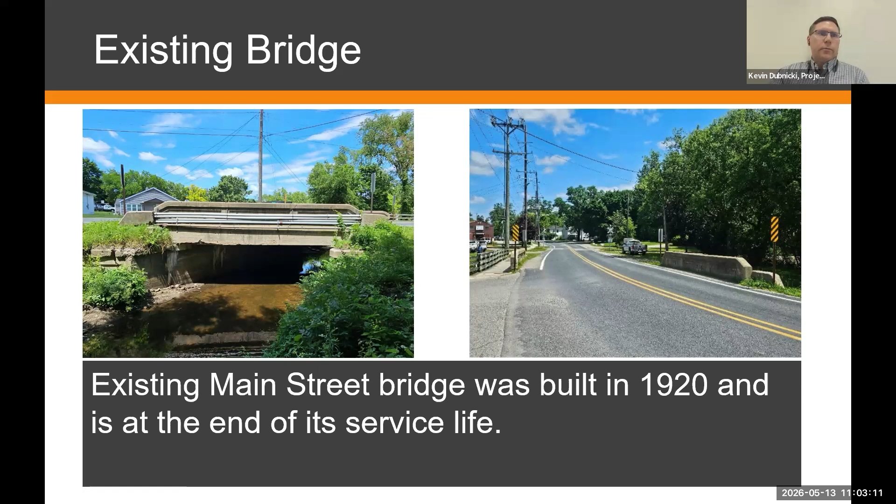The existing bridge is on Main Street, was built in 1920, and is at the end of its service life. Currently, there's a pedestrian path on the west side of the bridge, and it is a concrete bridge construction with asphalt overlay.

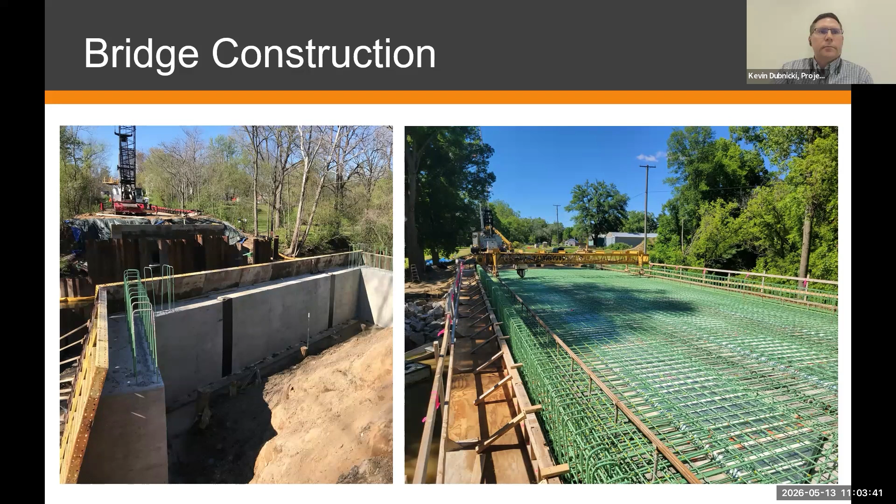The bridge section will consist of a concrete deck and raised concrete sidewalk located on the west side of the roadway, and will utilize tub girders for the structural support.

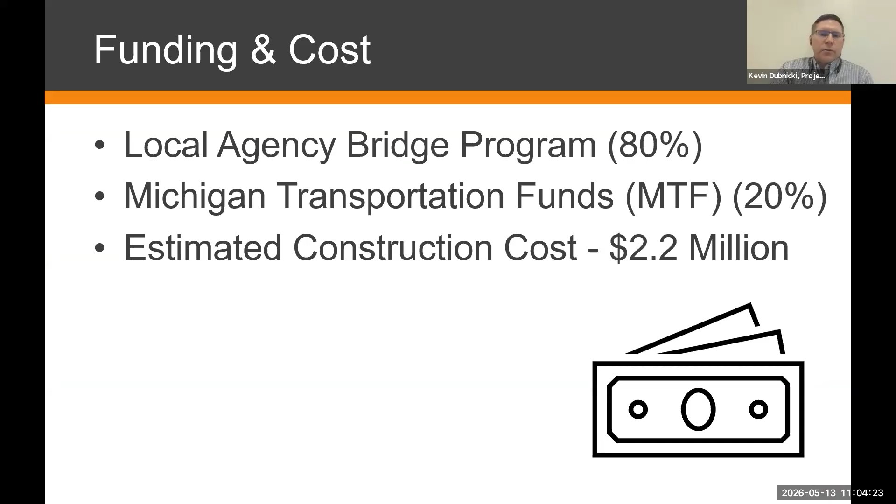Funding for this project: the Local Agency Bridge Program was 80%, and Michigan Transportation Funds (MTF) was 20%. Estimated construction cost was $2.2 million for this project.

The bridge will be closed to all through traffic, and the detour will be posted. The bridge will be completely removed, and the detour will go around the closure.

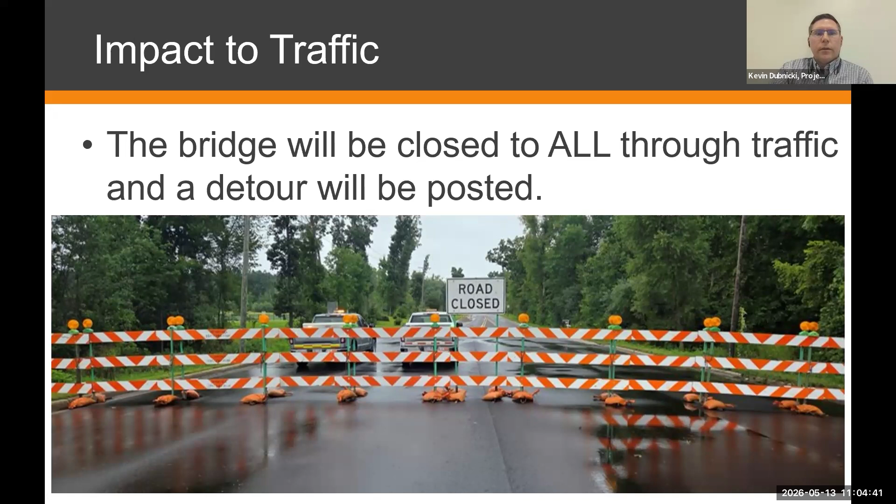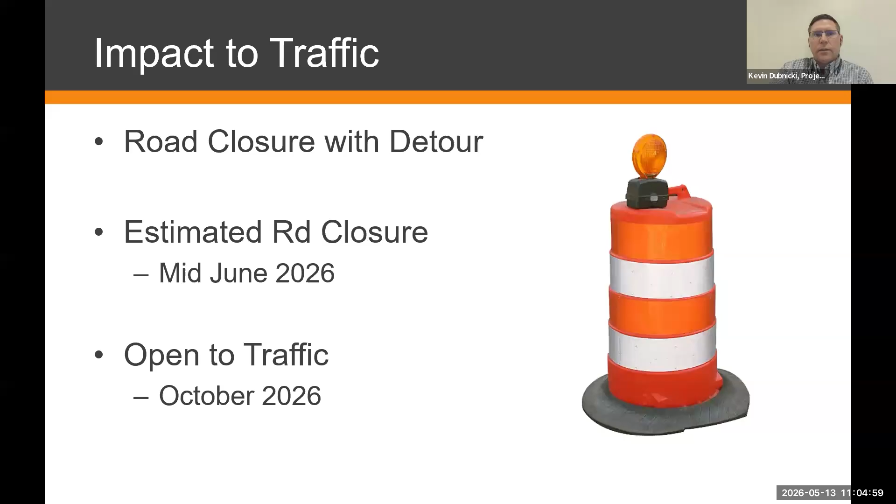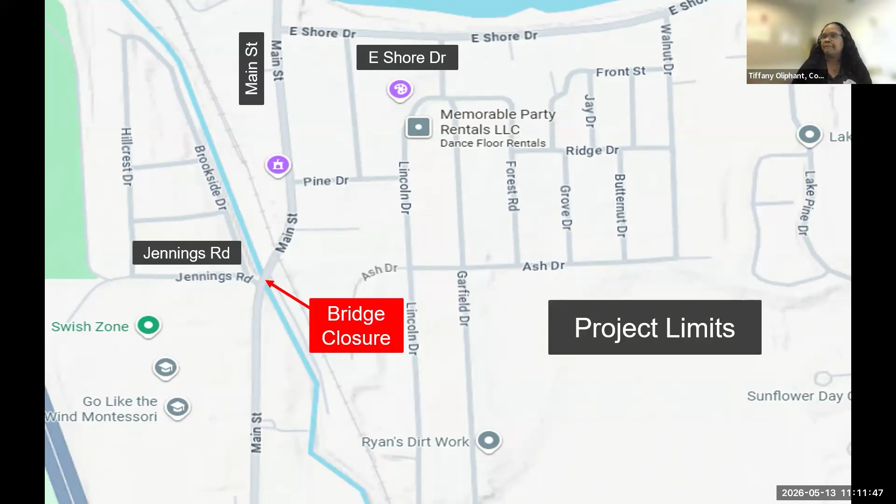Hi, good morning. I was just wondering what, if anything, in the way of signage is going to happen to kind of detour traffic that generally exits 23 at 6 Mile to go through town as a shortcut.

There'll be signage and type 3 barricades placed at appropriate locations, such as on Main Street, indicating the road will be closed to through traffic. We can place the signs, but unfortunately not everybody reads them. So there will likely be people for a short period who try to traverse Main Street but have to turn around. We can't enforce anybody from driving around these soft closures for the no-through-traffic signs until they reach the hard closure up by the bridge.

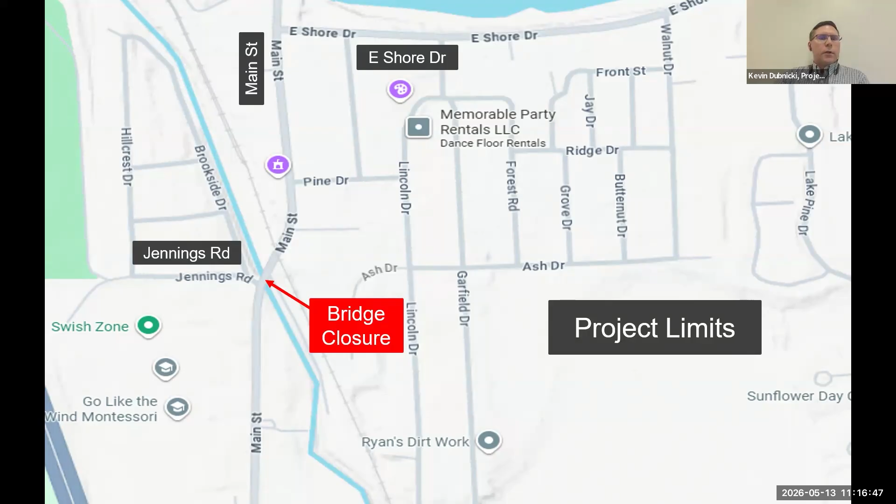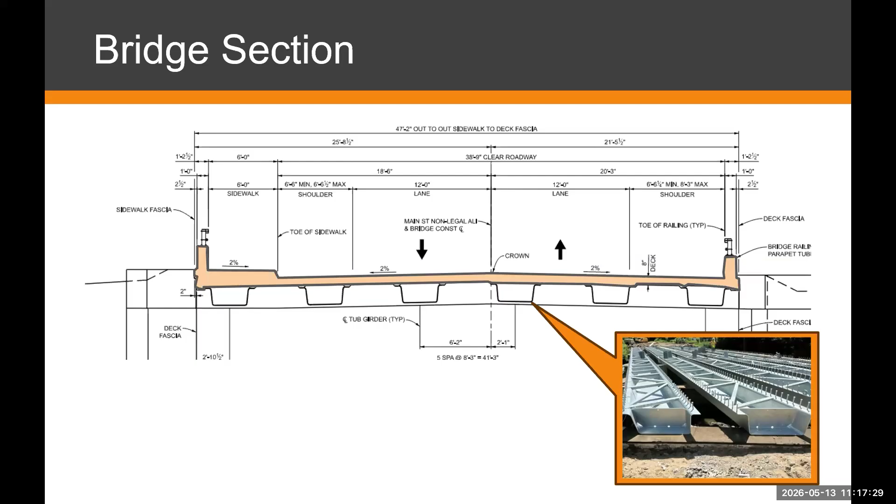Did you state there will be a temporary road for Main Street or a roadway detour? The Main Street will be closed down. There will be no temporary roadway going around the bridge. It will be a full detour. The temporary roadway I mentioned was only for Jennings Road, to access the residential communities back in that area.

Are there any plans for a temporary walkway to allow pedestrians to traverse the Horseshoe Lake outlet? No, there's not anything planned to cross the outlet.

Thank you, Jackie - Michigan, it's the Michigan Department of Environment, Great Lakes, and Energy. Yes, EGLE, she put that in the chat.

Do you have a downloadable map, PDF, or PNG for the intended detour, both southbound and northbound? Alexis asked that - we will post those on our webpage. Actually, it should be on the webpage right now. For a downloadable one, I believe we can provide that if you send me a direct message so I can get your email.

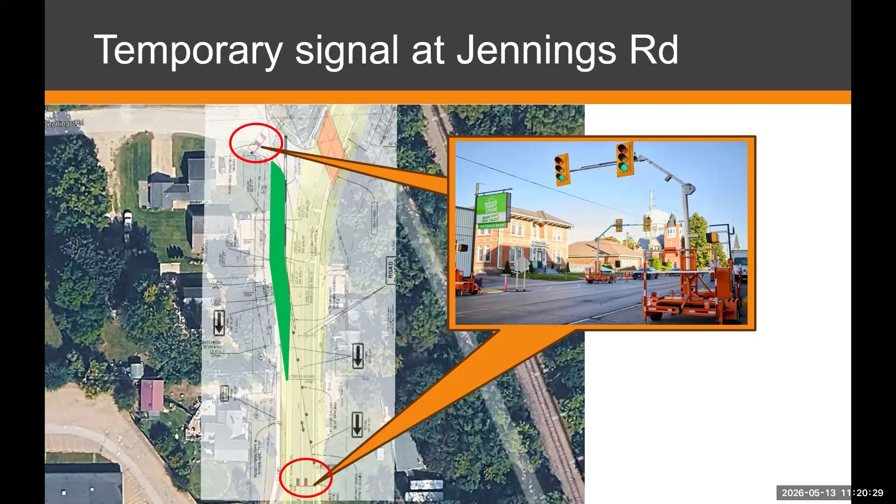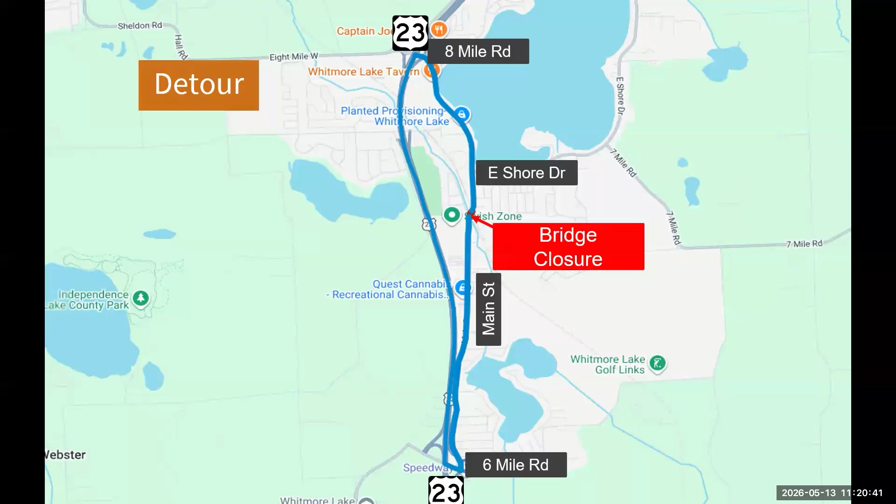I want to go over the detour again. Can you just go over the detour again, Kevin, so people are clear? From the Main Street Bridge, if you're on the north side, you continue on Main Street up to 8 Mile Road, there's a roundabout there to get to Highway 23. Generally, the main detour is utilizing 23 northbound and southbound. If you're on the north side of the bridge, you make your way north to US 23, head south back to 6 Mile Road, exit there, and traverse back north on Main Street to get to the opposite side, and reverse that. If you were on the south side of the bridge, you head south to 6 Mile Road over to 23, take that northbound to the 8 Mile Road exit, then head east onto Main Street to get back to the opposite side.

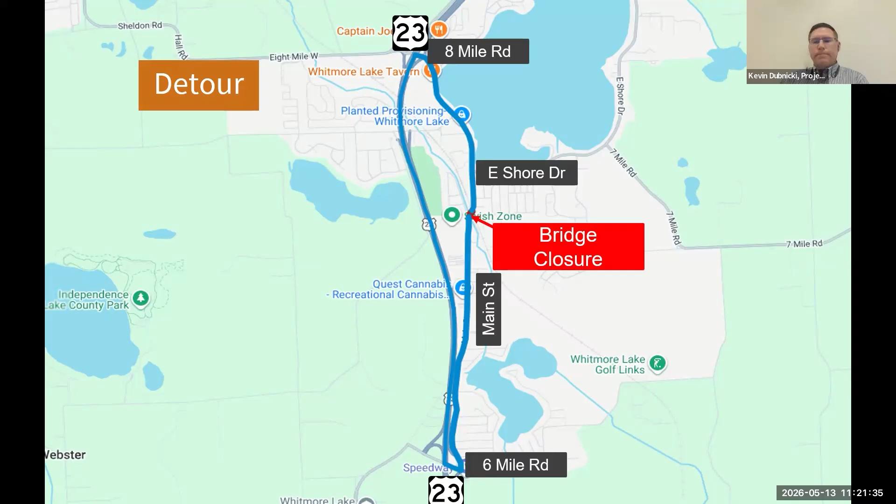Thank you, Kevin, so just wanted to go over that one more time.